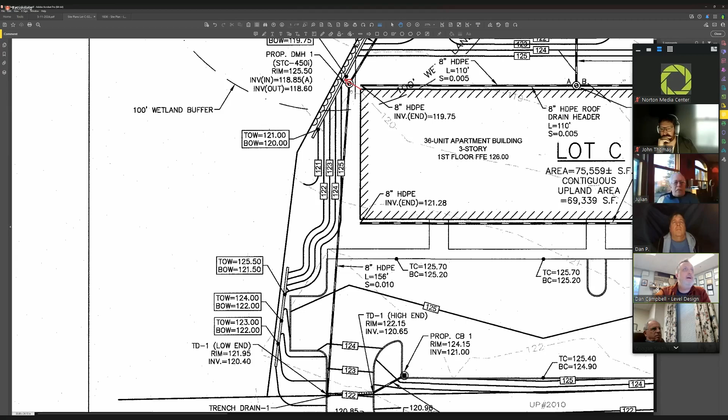Good evening, Daniel Campbell, Level Design Group, on behalf of the applicant. We received our most recent set of comments, which were minor in nature, last week on Friday, I believe. Those comments had to do with this area and the top of this wall specifically, and how the grading flows to the abutting neighbor. And we will respond to the comments, but I just wanted the commission to know our plan is to utilize some grass swales in that area to direct stormwater from the top of the wall.

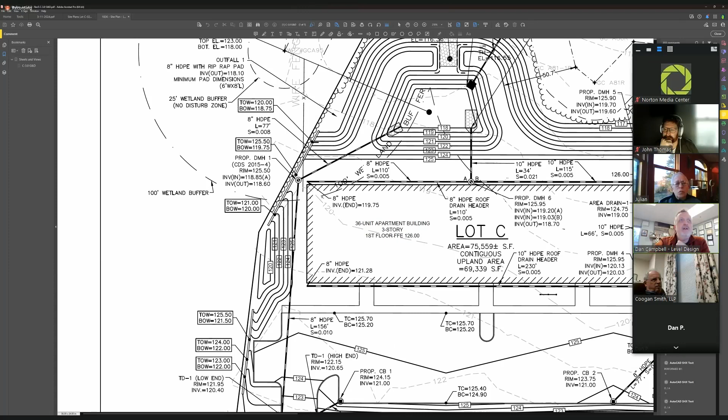This is the start of a draft. We're going to do the same thing on the other side, swaling water down off the wall towards a small grass depression or grass swale in the side yard prior to discharge. And then we're making a modification to the stormwater line. Instead of the stormwater line daylighting, that stormwater line is going to go to the basin for greater TSS removal, making all of our treatment trains compliant as requested by your review engineer at Horsley Witten.

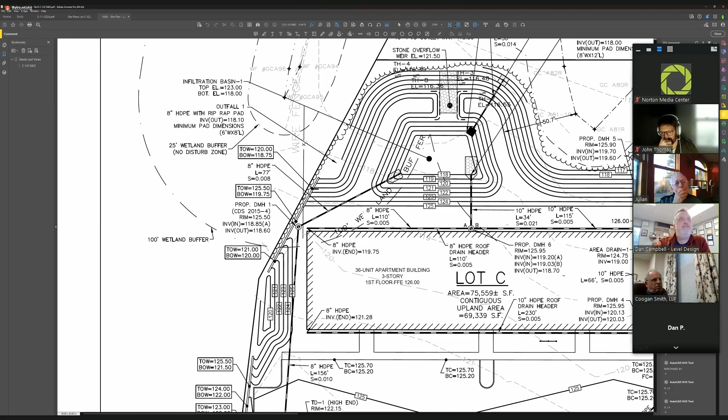Out of the commentary that we had, I believe we've got 4 outstanding comments. I believe 3 of them relate to that area at the top of the wall, and one of them relates to the TSS removal, both of which can be rectified by the same thing, by that movement of the drain line, as well as the modification of the overall swale at the top of that wall. Otherwise, the comments on the site as a whole have been addressed.

As you'll note, from the first public hearing to this one, there have been very minor modifications to the way the site looks, the way the site is graded, and the way the site functions. What the questions or commentary have been about is better clarification for construction documents, what the outlet structure looks like, how the outlet structure functions, providing a detail for the structure itself, not on the piping or the transport of water, but how it discharges that area on the side, for instance. So the site primarily looks like it did during the very first public hearing that we had on the project.

What we've been doing is a lot of paperwork cleanup, and we do appreciate Horsley Witten's quick review on this last go round. I think we handed in right before the previous public hearing, and they did get it back to us last Thursday or Friday. And I think we're going to turn it around tomorrow morning with some of this commentary having to do with that small graded swale area, as well as swaling the water off the top of that wall with the TSS sheets that they requested.

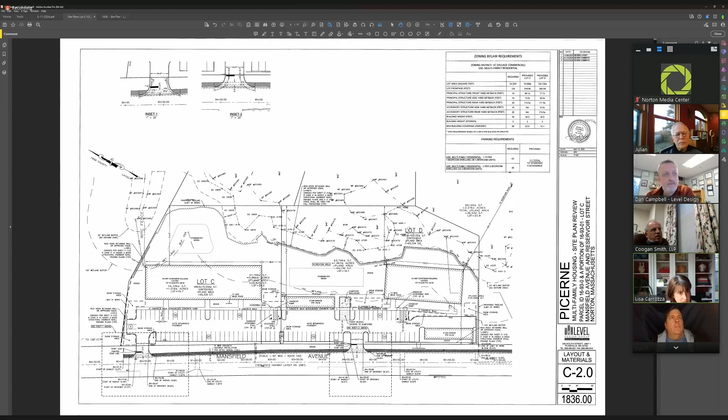Okay, and then I have a last question. You can go back to the layout plan with the wall and the elevation. So theoretically, you're going to have 48 units with zero open space and backyard. And I think it's part of our mission here to make sure that people don't interfere or intrude into what is left over, which is basically the wetland.

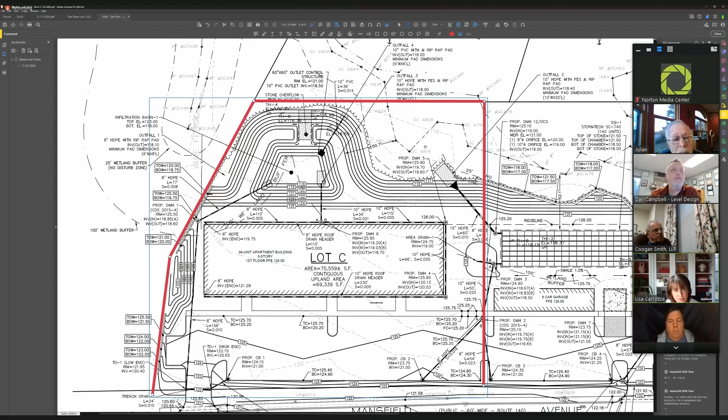So I understand, and that was a question of yours when we first started. So we created an area, we pushed the buildings further apart, and we created an area that was not only blocked from the street between the garage and the fencing around the dumpster, that is on top of this subsurface drain system. So instead of having an above ground basin, we wanted to create an area where the persons who live there could either congregate, could play with their dog, could throw a Frisbee or what have you.

The distance between these two areas is a few hundred feet. So they do have quite a bit of area in between those two structures. Okay, I think where I was going was with intrusion into the wetland. So that said, John Thomas, typically you're not going to have something on top of a wall. So the question is, will the wall itself act as a barrier? How high is that wall? You can run us through from where the outlet is. Looks like it starts there.

Yeah. So the wall starts in this location as it comes up grade 1 foot, 2 foot, 3 foot. On the back side of the wall, it is also climbing. So we're around 1 foot tall in this location. We're around 4 feet tall in this location. We're back down to 1 foot tall in this location. The highest points are here and here. As you're coming around the site, you're about 7 3/4 feet tall here, about 7 3/4 feet tall here, and you're climbing back down to approximately 1 foot tall behind the building.

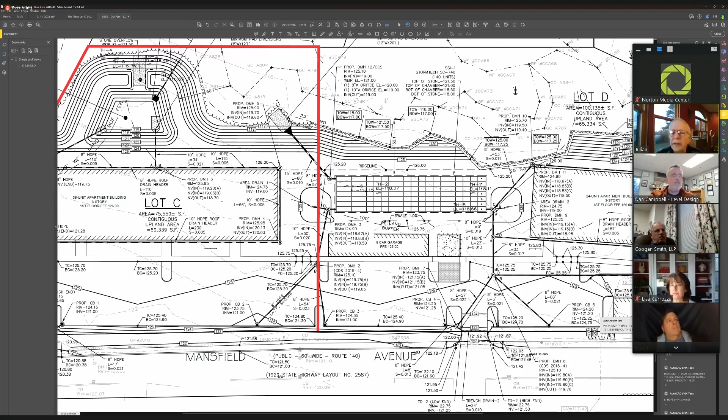I mean, the stormwater peer review is not complete? Is that correct? I gather they've got some minor adjustments to do based on my understanding and my review of the report and the correspondence that's been going back between Dan and our peer reviewer. But I can start drafting up a draft order of the project as such, alluding to the wetland visual barrier posts being put in. We do have placards that we typically use, but to Mr. Jacoby and also Dan's suggestion, having additional signage that says no dumping, I think that would alleviate a lot of the potential issues we'd see with the apartment buildings being there.

So I can draft something up in the interim, but I would basically look for a continuance tonight for the next meeting and then potentially have a closure and issuance at the next meeting if that's what the commission chooses to do. And that would also allow us to go to planning tomorrow night to make sure that they had no adjustments that they were looking for. So it would make sense that we go over for 2 weeks.

Mr. Chairman, before we consider a motion to continue, not quite yet. We have to open up the questions to the whole audience, just in case there's some people that want to ask specifically about this. You can do that either by going to the reactions button and pressing raise hand, or just putting your mic off mute and asking your question. But unless we have any questions, I think we've covered everything and can continue, coming up in 2 weeks on the 25th of March. So seeing no questions, we can go for a continuation.

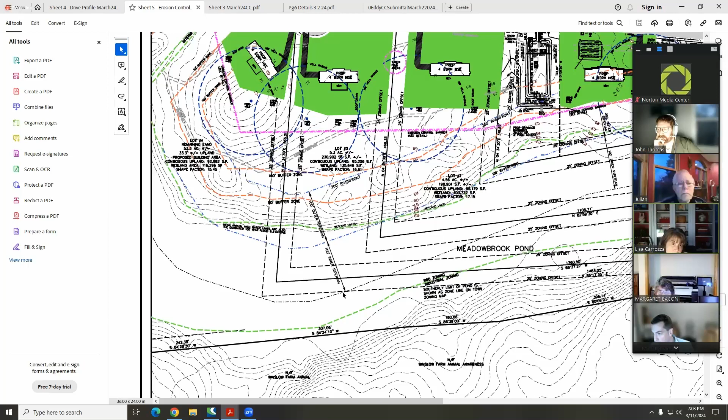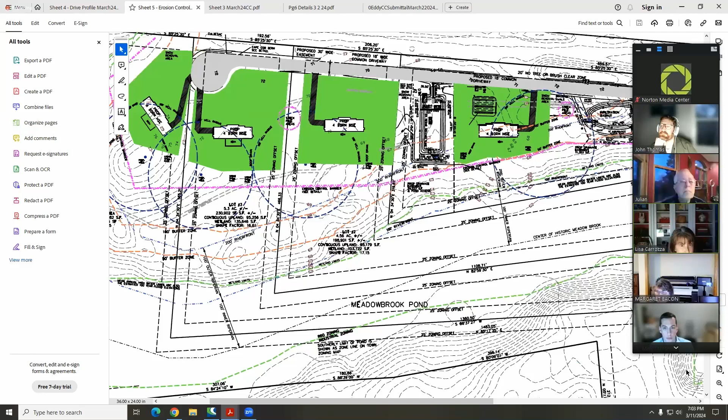Okay, so John, we're going to have to get fairly creative with this in terms of limiting access and tree removal. I see you're showing the lawns theoretically where it's going to be green. If you can zoom in a little bit to one of those lots, what is the pink line? Oh, I got stockpile areas, and this is the erosion control barrier. The sediment control barrier. Okay, so why is the sediment control barrier offset? Is it to accommodate the well? Because it theoretically should be against the lawn.

Well, I had to keep, like I said, the wells pushed back a little. I mean, it could have been tightened up a little, but here's the 100-foot buffer zone down here, and the erosion control does get tighter as I come up through here to the first house, and then the stormwater basin. Okay, if you can just tighten up the sediment control to meet the lawn wherever you can, that would be helpful, because they don't really need to clear beyond that, correct? No? Okay, so if you could tighten that up, that would be great.

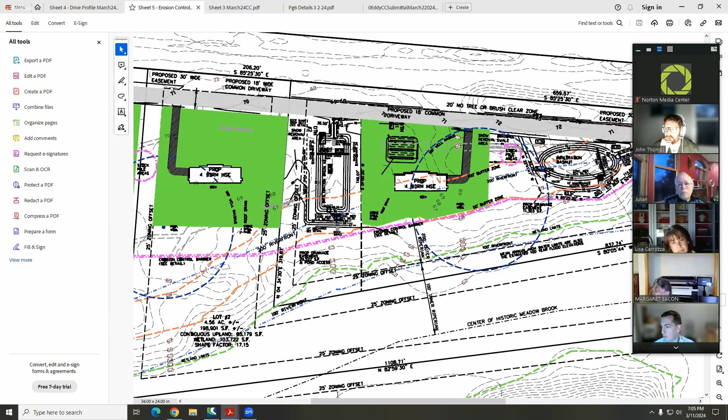Now, the one thing I think that's missing, that you haven't gone over, is your new riverfront area calculations in terms of impacts based on this new layout. For the record, we'll need those. Actually, the riverfront impacts really don't change. So here's the 200-foot riverfront area right there. It goes through this basin just like it did before. That doesn't change. It just clips the corner of that house and this lawn.

So the only house that's really within the buffer zone in the riverfront area is this first lot, and then the stormwater basin here, and the other area in the riverfront is the existing gravel drive. So those calculations haven't changed from the notice of intent, and we're still well within. I think the amount of riverfront impacts is 1.6% if you do the math based on the total riverfront area on that parcel.

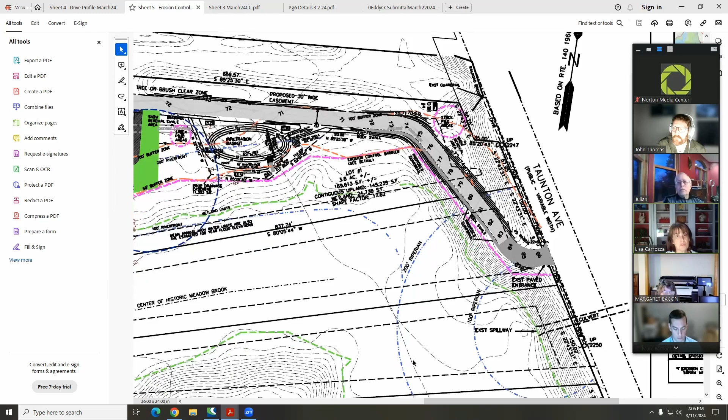Okay, and that was going to be my next question. So can this parcel, exclusive of what you've already subdivided, be developed any further? No, because the planning board's specific, we have four lots. That's all we can get on here. This is what was approved by the planning board. Right. I think the point I'm getting to is, the owner owns more than just what you're showing us, correct?

And they could come at some point and show us yet another group of houses, so we have to take a cumulative approach to the riverfront on this. I know it's a very large riverfront. Your denominator is huge. It's only 1%. But it's just something that we have to be mindful of.

So maybe we can just put that in the findings, John. So Thomas? Yeah, they're not going to be able to. They're basically locked in. The rest of the property's landlocked. The common drive, this whole entire area, this common drive, I think they had to get a waiver for to even get in. Okay. So there's no way they're going to be able to develop any other portions of the property.

If you're talking about more development on the 4 lots here, I think we should write that in as saying that, for instance, any future disturbance or anything they're proposing to do, they need to come in for an evaluation through the Conservation Commission to establish. And we just basically use that existing riverfront calculation cumulatively for that. So we can write something up in an issued order stating the facts there.

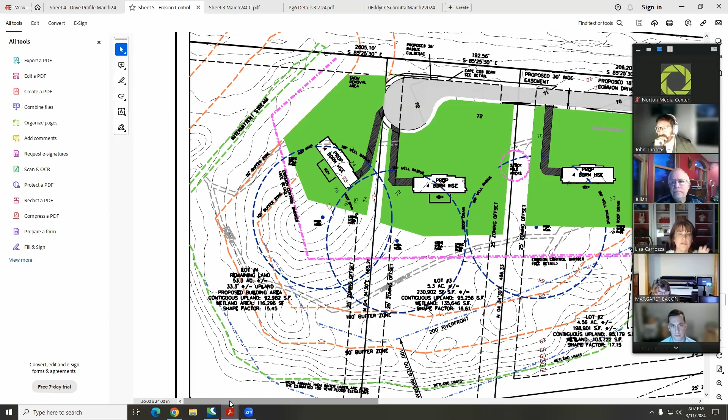Okay. Can you zoom in on the access path, so that we don't have 4 separate homeowners trying to create paths from their backyard and cutting down vegetation? Sure. We were trying to take advantage of this existing easement right here for this stormwater or infiltration basin. So I do have a walking path right here for pond access, and it gives me the area of the easement here. I know it's not very legible, but right here, walking path for pond access.

Does that go to the pond edge? It should go to the pond edge, yes, because here's the easement right here, and this is the other side of the easement to the pond. So we're going to want to see that pathway going to the pond so we can just have record of it. That way we can just have that information laid out, so if anybody has any questions, we can say it was established here for the residences, the HOA, whatever they're going to be. So we can basically maintain it and establish it.

Yes. I do know the original ANR plan had the original common driveway right through the middle, and that's where that easement is. So we have to revise that easement to reflect the new location. And I believe under that plan, we could better describe the easement for the walking path here at the stormwater basin, because these are all going to be easements also, so they should all be included on that.

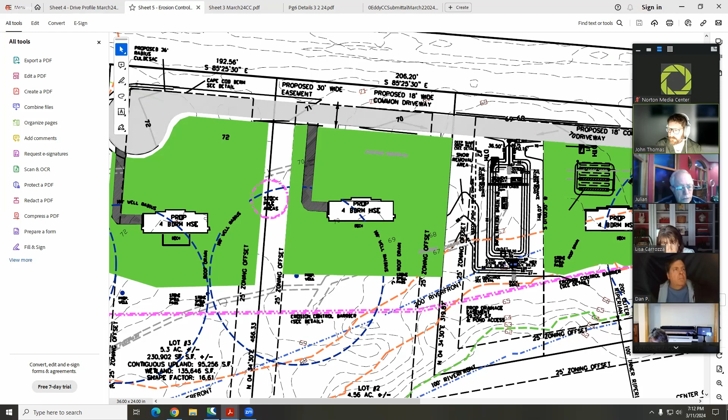So, John, I think I'm going to need some clarification. This project has been going on for a rather long time, and now we have a change. Is additional information going to be forthcoming, or are we at a point where we would actually consider closing this? Well, I leave that up to the commission to make that decision, but one condition that I am going to recommend, that I've talked to Mr. Wydacht about, is conditioning the existing dam that's out there.

We've had a discussion about it, so I think the homeowners association is going to be responsible for making sure that that is free and clear of all sorts of debris, functioning properly, and there's no obstructions. And they're going to be responsible for any sort of management criteria. I just don't know if the commission wants a formal operation and maintenance plan from the HOA, or something just in the event of an emergency. So I assume there's going to be a stormwater

O&M plan. So there is a stormwater O&M for the roadway. It doesn't include the dam. Right, but it includes the infiltration basin so those people know what they're getting into. Correct. So who's going to own the dam? Is it going to be all four homeowners? That is my understanding as of right now. Well, I absolutely think we need to have an O&M plan for that then.

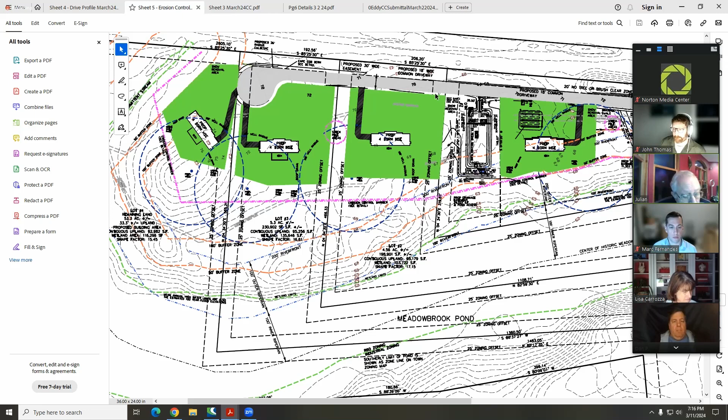So unless there are further questions or items to discuss, we can consider a motion to continue this hearing until our next meeting, which is the 25th of March. So moved. Second. Motion made by Lisa, seconded by Marc for continuation of the hearing for file number 250-1136 until March 25th. Roll call vote beginning with Tamah and Paxton. Aye. Aye. And Marc and Dan. Aye. Aye. And Lisa. Aye. And I'll throw in an aye. So the motion carries. Depending on what more has to be discussed, we may or may not see you next time. Okay, thank you.

So our next item on the agenda is file number 250-1143, 360 South Worcester Street, concerning a warehouse construction. On my agenda, there is a requested continuation until April 8th.

If nobody's going to say anything about it, then I will happily make a motion to continue the public hearing to April 8th. Second. So we have a motion by Dan, seconded by Tamah, for continuing the hearing for file number 250-1143 until April 8th. Roll call vote. Paxton and Marc, how do you vote? Aye. Aye. And Dan and Lisa. Aye. Aye. And Tamah? Aye. And I'll throw in an aye.

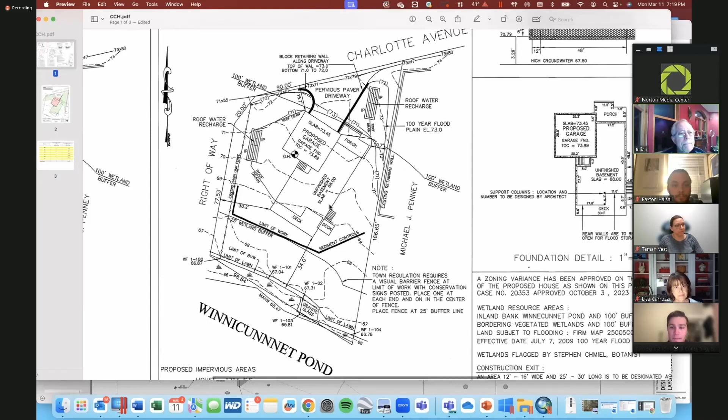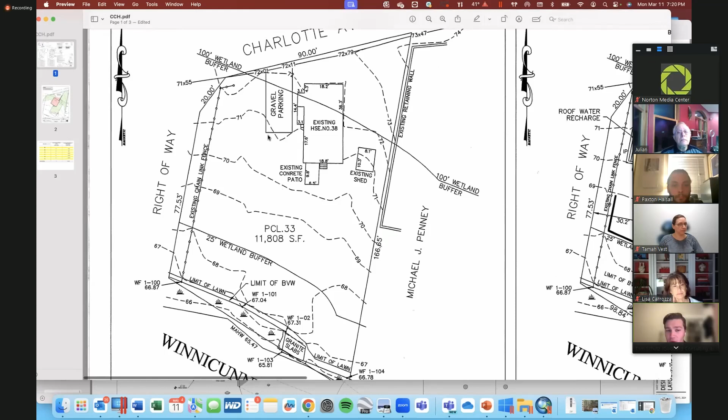Yeah, okay. So just a brief background of what we're presenting here. The applicant is proposing to take down and rebuild the existing single-family house on the lot 38 Charlotte Avenue. The entire site is currently lawn, which is around the existing house. Here's the existing house. We have a gravel parking lot and an existing shed. Down to the south, we have a BVW that borders on Winnicunnet Pond. So the applicant is now proposing a new single-family house complete with a deck, another deck in this location here, a garage with a house on top of that, and then a driveway in this location.

The entire site, except for a small portion up in this location, is within the 100-year flood zone, so it's all within bordering land subject to flooding. So we have provided the calculations to mitigate for that. We have a net increase of flood storage on the site. That information was provided to John. We have provided new plans that include grading up in this location here. These are graded down to provide more compensatory flood storage. As you can see, the dash line is the original grade, and we're grading it all the way down to 72 in this spot, and then grading the 71 up to here. So providing additional flood storage than what we had previously provided to the commission. We're also doing increased grading in this location here too, just to allow for more grades at the elevation 70 and 71 and 72.

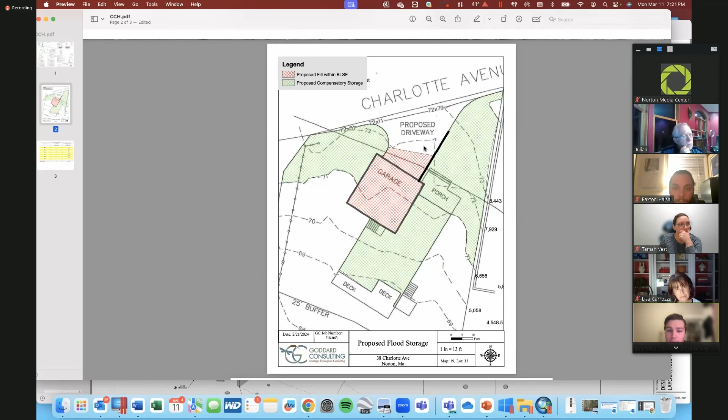So here is a graphic of where we're providing all of our compensatory flood storage. In the red, this is where we're going to be filling the flood zone. That's going to be a portion of the proposed driveway, and then also the garage, which is going to be outside of the FEMA flood zone elevation of 73.4. The rest of it is going to be within the FEMA flood zone, but cut down to elevation 68 all the way up to 72, which is up in this location. We have a cut and fill table here. As you can see at each elevation, we're not increasing any of the fill. We're actually providing additional flood storage at each elevation right here, resulting in a total of 1,644.5 cubic feet of additional flood storage that was not on the site.

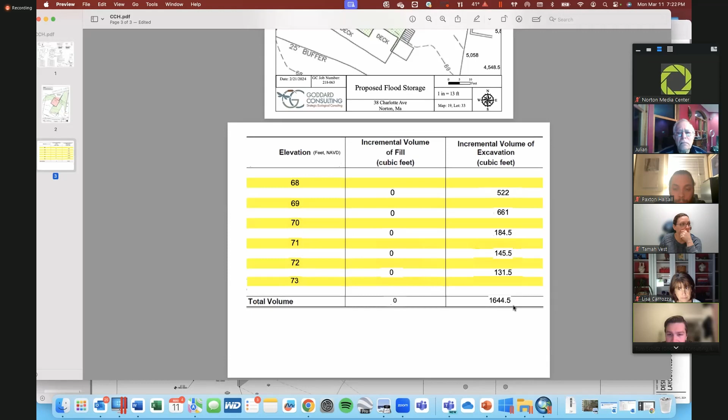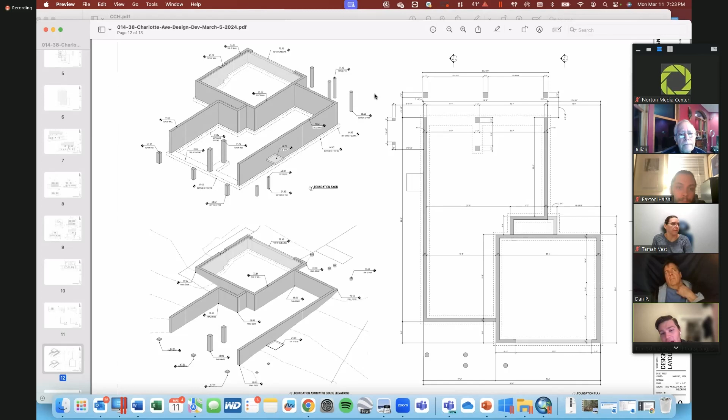We'll also take a look quickly at the architectural plans, because that was something else that the commission wanted to see. In this location here, this is where we're providing a lot of the flood storage mitigation. This bottom section of the house is going to be all flood storage now, where previously there was a wall running across right here that was going to be dry space. It's now going to be all open to floodwaters, so it'll all be able to flood down here. There's going to be no living space. The floodwater is going to be able to enter through the back of the house here because we have just pillars, and then recede back when the storm is over. Additionally, there will be flood storage provided towards the eastern portion of the house. So that was what we provided to the commission. If you have any questions, I'd be more than happy to answer them.

Is there any grading interior to that storage so that the water will flow back out? So it's at grade 68. We can put a very small amount of incremental value, like 0.1, but right now it's unrestricted flow in and out of the back of the house. So it'll flow back down because the elevation down here is 67. So eventually the floodwater will exit the bottom of the house and back into the BVW and Winnecunnet Pond if

that happens. Okay, but you're not grading interior to that unfinished basement. So how does the water get out of there? So down in this location, we're starting our grades at elevation 68 in here, and that grade is going to be all the way back. So as you can see, the slab is 68 here. So the 68 elevation will be throughout this entire thing. So it'll allow the water to enter at the elevation 68, which is down in this portion of the property, and then recede when the water is done.

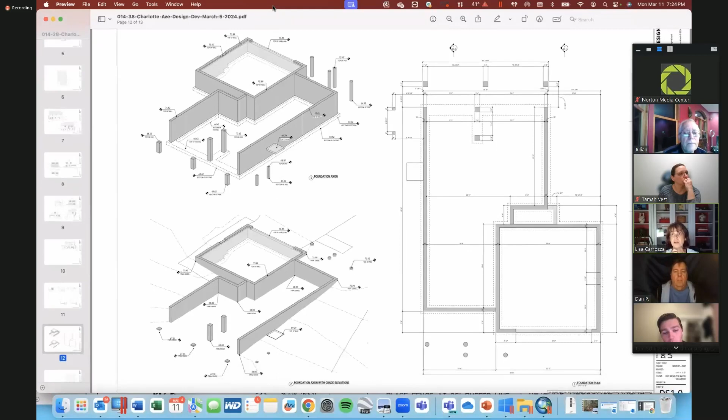Okay, this is what I'm confused about. If the entire thing is flat at 68, then the water's not going to drain, it's going to pond. It's a concrete slab. It'll drain out. It's going to drain out of the concrete slab through the back of the property here because it's going to drain back down to the 70 or the 67 contour when the water recedes. But the whole thing back to the back edge of that foundation is one elevation at 68. Correct. Okay, good luck getting that to flow at times, but okay.

So the house is on top of that area? Sorry, I didn't catch that. You were a bit muffled there. Yeah, the actual house is on top of that open area? That is correct. Yep, the actual house will be outside of the FEMA flood zone elevation. We met with the building inspector and we had a review of the site plans, and he gave us a verbal okay, but he's going to take a second look through the entire site plan and the architectural plans. Those were sent to him, and write a memo saying that he is okay with the proposed site plans as they currently stand.

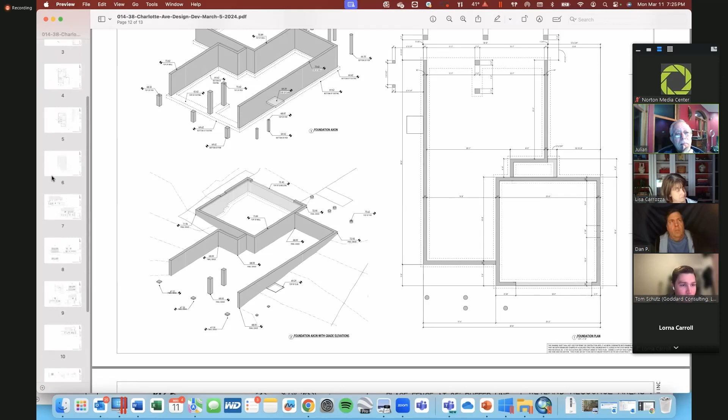Let's see. Is it by a stairway or? So here's a representation of what the house is going to look like. Down in this portion of the house is where the flood water is going to enter. The entire house is going to be above the flood zone elevations. There's not going to be any living space down below where we're currently showing that the flood water is going to be stored. It's just going to be all open to allow the water to have unrestricted flow into our compensatory flood storage below the house.

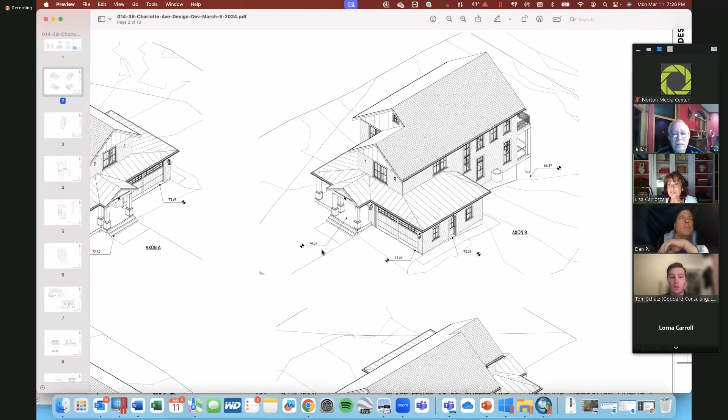I don't know how to ask this again, but in effect, if it's flat, how is it going to recede over that distance? You should be grading underneath that slightly so that it recedes and flows back out. Otherwise, it could be ponded and trapped against that foundation, and I certainly wouldn't want to live there with water standing below my house. So we can add a small elevation change here, but still keep it within the 68 grade if that would be okay. Well, it would be a very slight grade.

Yeah, you need to ask your engineer that, because I would not live in that house knowing that water may not recede underneath me. If it's flat, it's not going anywhere. It's just going to pond up. You're going to have standing water under there. It's not in a coastal environment where you typically have something on piers and it ebbs and flows with the tide. Storm water will recede back when the storm is completed, and the water will recede as well. It's not going to just stand on top of a concrete slab. It'll recede back down to the 67 contour, and then the 66, which is the BVW.

It won't make its way out of there if it's flat. That's all I'm trying to say. So you should probably check with your engineer, because again, I can see water ponding there. You're saying the 67 is lower at the mouth of it, but in the back it's flat. Well, Lisa, I think the point you're making is it needs to be graded in the same way that a parking lot would be graded to promote drainage. Yes. But this is more a building inspector and perhaps planning board requirement.

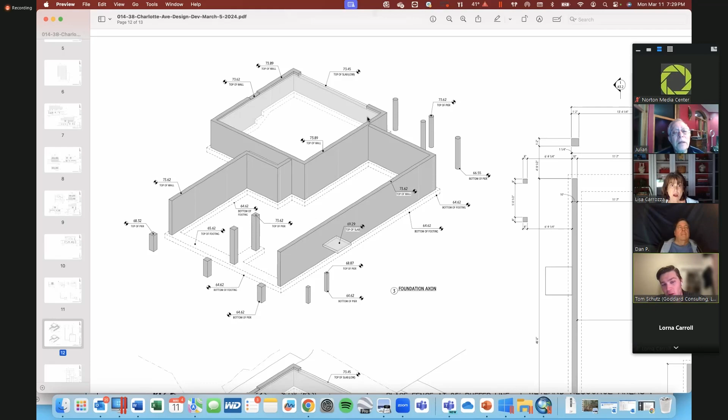All right, and the space under the garage. So this is all being filled under the garage here. This is going to be dry above flood elevation. This is 73.89 at the top of the concrete. So this is going to be the only area aside from this small section of driveway that's actually going to be filling within the bordering land subject to flooding. And we're mitigating with the section under the house and then also the compensatory storage that we're cutting over in the top right corner of the property.

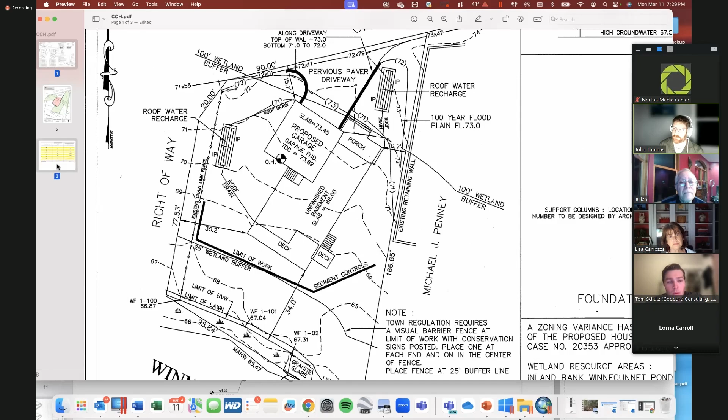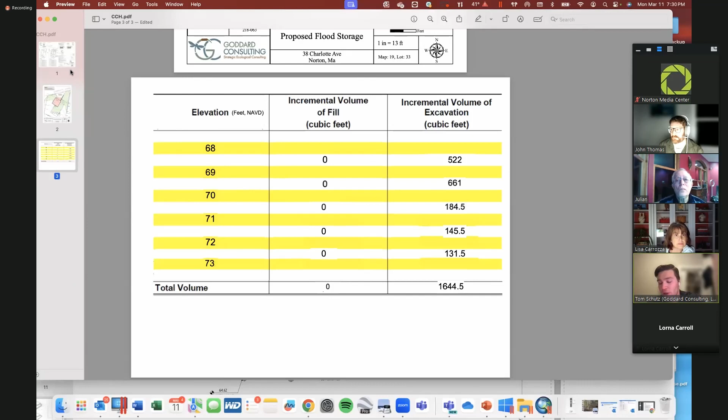Yeah, my suggestions to the applicant were to update the impacts for the fill table because of the garage and also part of the foundation and stuff like that. So we did do that, John. Okay. We sent it. This is all a new table, and then this cut fill table is according to that table. So the numbers we got from here are according to the plan set that we sent to you. Right. So the incremental volume of excavation, I'm talking about the incremental volume of fill.

So for instance, we're going to be increasing the amount of compensatory flood storage at each elevation. So there will be technically no fill within each elevation. The numbers wouldn't be greater than 0 in this case because we're actually increasing the amount of flood storage in the elevations. Okay, so you do the calculation that way. So for instance, if you have fill within the floodplain, you have to call it out. And then basically the volume of excavation gets calculated off of that.

So for instance, what you're gonna need to basically report is that there is fill, because I'm looking at this table and it shows that you have 0 fill when you have a proposed garage that's filling into the, that's what I'm getting at, is that information needs to be reflected accordingly in this table.

That's not how the table works, though. As you can see down here, this is the area that we're going to be having most of the fill because the numbers of compensatory flood storage is the smallest. So in elevation 72 and 71, this is the smallest section of area where there's going to be actual storage, but we're still increasing the amount. So we're not actually going to be having any filling that's greater than what we're cutting in these areas. Okay, this table's wrong because you have to account incrementally. It's like you're taking the delta. You need to show us how you got there.

So I suggest you go back to the MACC hydrology handbook or the state's hydrology handbook and see how to fill one of these out. Because you absolutely have to tell us what the incremental fill is before you can tell us, okay, great, you're compensating for it, but you need to show it. You need to fill out that part of the table, how much you're filling. MACC, I think might not be MACC, it's probably DEP. Stormwater handbook tells you step by step how to fill this out. Because right now you're not showing any fill, but you are filling. So that has to be fixed.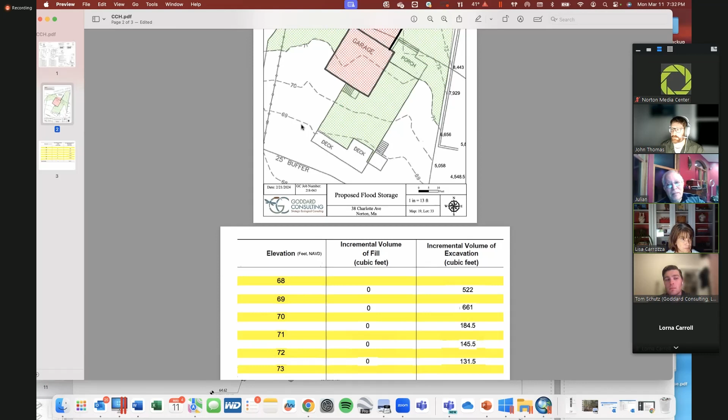And can you go back to the layout plan, please, with the grading? Oh, I mean, it looks like you did the calculation on this plan. These are the calculations for the compensatory flood storage. Did you show the fill there?

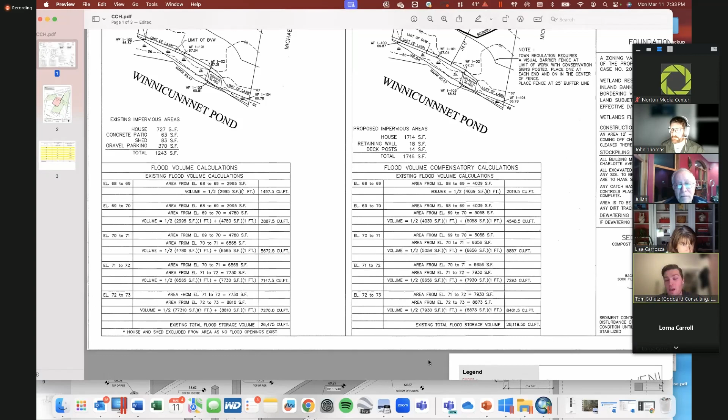Where's the volume of fill? So the way you do these is you take the elevation square footage. I know how to do them, okay. Yeah, I know how to do them, but I'm not seeing your fill volume. But anyway, okay.

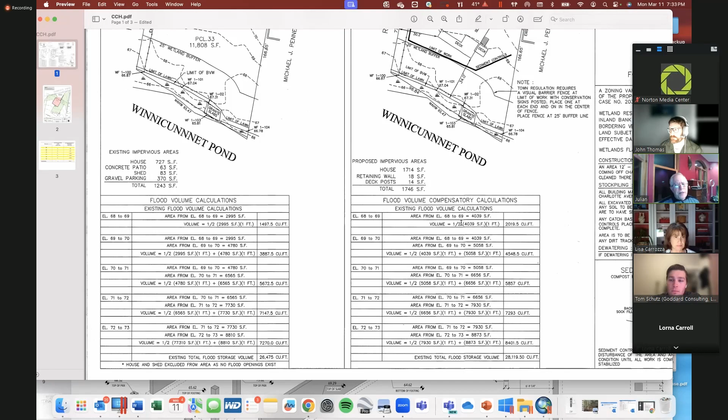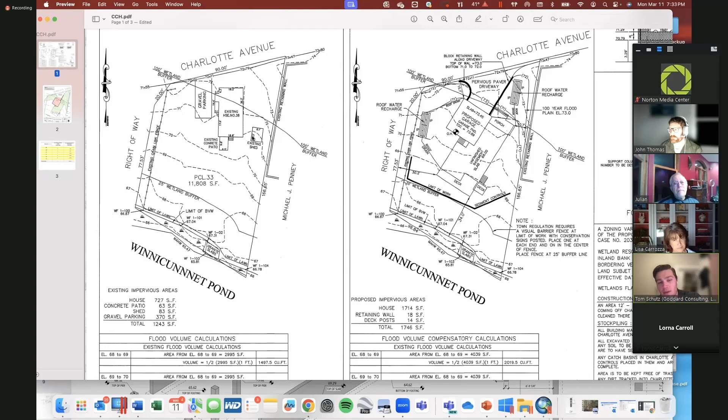Is some of this because you're filling in an area that the previous house displaced? That is correct. So okay, well that needs to be clarified, I think. It is clarified in these numbers here. These numbers reflect that the proposed garage and the area within the small driveway is essentially the same as this piece of the house and the existing shed. We're actually increasing the volume by a slight margin, several thousand cubic feet.

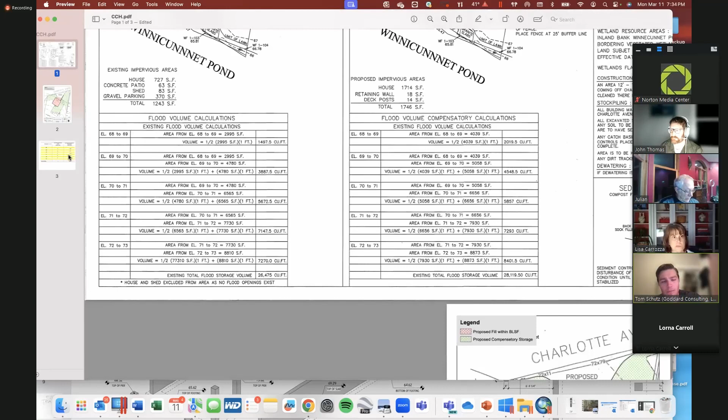Right, but go back to your table for a second. So the way the table should be filled out. So the table, okay. The table is subtracting the current value of what is out there to the existing table. That's how we filled it out. We're not increasing any fill in any of the locations. We're actually increasing the amount of excavation in all of them.

Right, but what you need to show here, so between 68 and 69, you should have a value. What is the incremental volume of fill? Say that's 320 cubic feet, and then you're going to say at that same elevation, we're going to have the excavation, which is the storage proposed, which is the 522. So you need to show on an incremental basis that your compensation volume is higher than your fill volume at each elevation. So I think that's the only thing that's missing from this table.

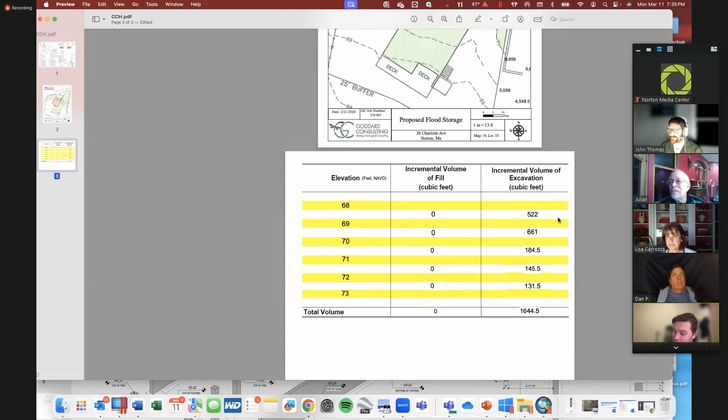Tom, you're not responding to that. We'll certainly check it out, and we'll take a look at the table and send it back into John when we've had some time. But we're definitely going to need to take a look back and see if we can revise the table accordingly if needed. Or otherwise, we'll speak to John and work it out. Okay.

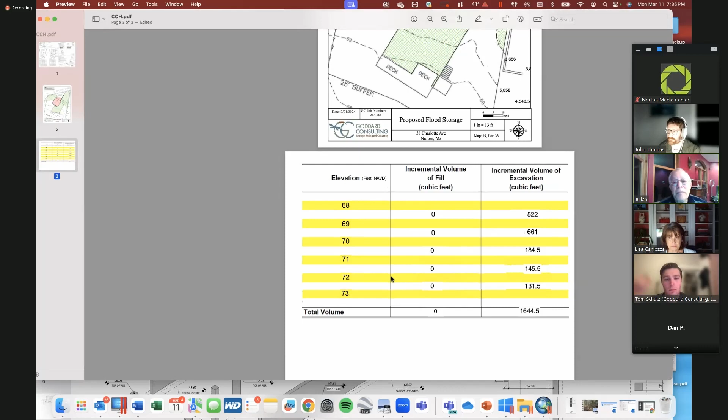I mean, certainly I would comment this is a big step forward compared to what was initially presented to us, and I think these are relatively minor issues that can be clarified. I think all the information's here. It just needs to be compiled neatly and comprehensively in a package. I think Tom and his team did a good job with getting us the information and everything. Some of the information needs to be clarified, but I think most of the information's here. We just need to get it more concise and into a good package.

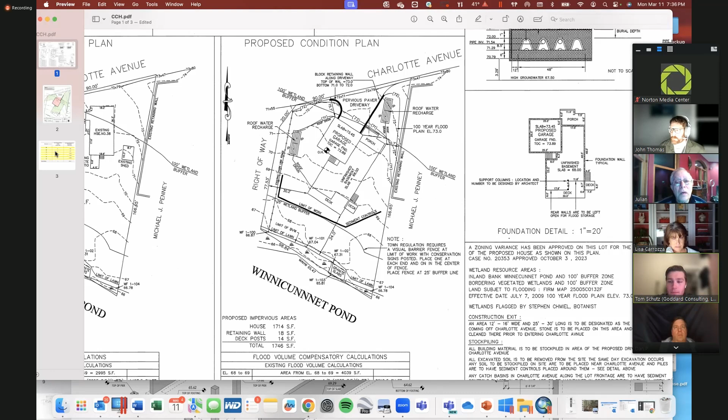So what would you like to see for the next hearing aside from the updated table? Is there anything else? And then check with an engineer about grading below that foundation so that it drains out and you're not compromising flood storage. Yeah, I gave you guys some suggestions. Obviously, the thing to take a look at is just to make sure the foundations and supports are calculated into your BLSF impacts, and just make sure you got all the information you need. And you sent me over the WPA form. I haven't looked at it yet, but I'll take a look at that and see if everything jives. But if that changes, obviously send over a revised version of that as well.

Okay. This is Eric Wensley, the homeowner. Yeah, Tom, thank you for bringing this forward. I appreciate it. It's a really good job.

My one question is for John and the commission. In the interest of time, for the remaining items that we have going forward, do you guys see any issue with the foundation design? For example, it's going to take some time to get this through structural engineering and things of that nature. I know we got through the building inspector. Nick had approved or was okay with the design that we had. I just want to make sure that the commission, at least from a structural standpoint, is okay, other than the grading issues and things of that nature. Do you see any changes on the horizon in that regard?

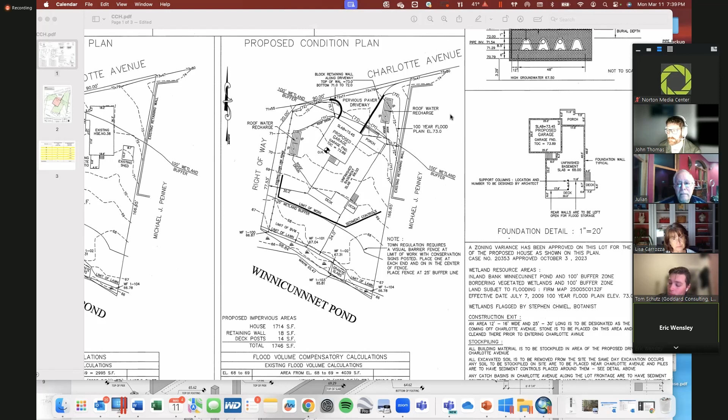Yeah, understood. And just so the commission knows as well, I'm not a builder or developer. My wife and I are going to live in the home, and obviously we'll get old and sell it at some point. But we're building it for us and our family. So, but I know that doesn't have any bearing or anything. Yeah, presumably you're not building it so that you have periodic flood damage. So yeah, of course, but we're not doing this with the intent of being out of it right away and having a future homeowner get stuck with a situation that they're not familiar with. So hopefully we're there long enough to experience whatever there is to experience and be able to pass that knowledge along to the next homeowner.

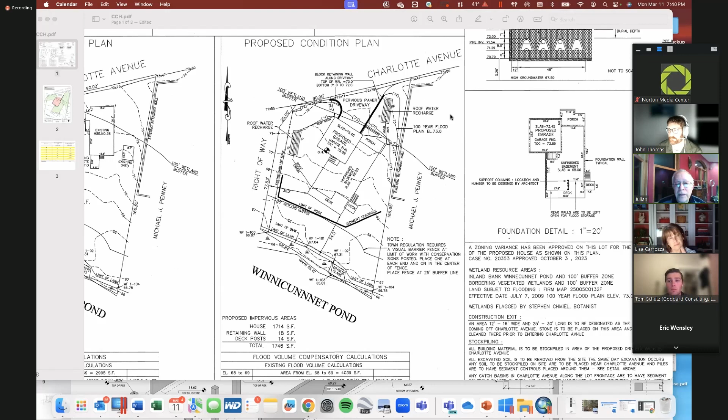Yeah, but from our perspective, we review many projects where the developer is here to present a design and sell something to buyers who may not be savvy about what the future risks are. For sure. And so you have to understand our perspective. Absolutely. That we're here to protect the interests of those who live here in Norton. Yep, for sure. And I appreciate that, guys. Thank you. That's all I had. Thank you very much.

So I think it still is within the possibility of being able to review an order of conditions next time, assuming everything gets addressed. But I think for the moment, we need to continue this hearing, and we may be in a position to just close it out and review the order. And I will work on drafting up an order for the next meeting in light of our discussions this evening, because I feel that the applicant can get the necessary information to the commission and make responses and changes to the design as needed.

So that being said, unless there are further immediate questions, we can consider a motion to continue the hearing for 38 Charlotte Avenue to our next meeting, which is March 25th.

So moved. Oh, second. That was pretty simultaneous. Not even a stopwatch would do that.

All right. So we're going to say motion by Dan, seconded by Tama for continuation of this hearing until March 25th. Roll call vote starting with Paxton and Dan. Aye. Aye. And Mark and Lisa. Aye. Aye. Tama? Aye. Okay, there you go. And I'll throw in an aye. So thank you guys. And we'll see you next time.

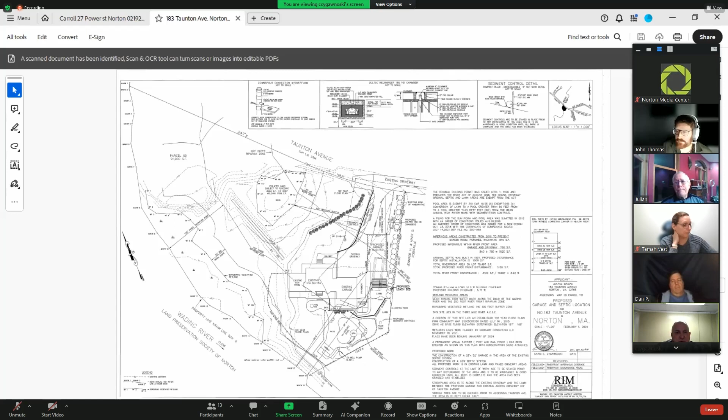Next item on the agenda is file number 250-1149, 183 Taunton Avenue. Do we have a representative of the applicant? Craig Cygawnoski of RIM Engineering, representing the owner, Lucas Washington, not with us tonight. Assume you want me to share screen. Go ahead, Craig. You have sharing capabilities. So, did that come up for you? Not yet. Yeah. Now it is. You'll have to enlarge it a bit, though.

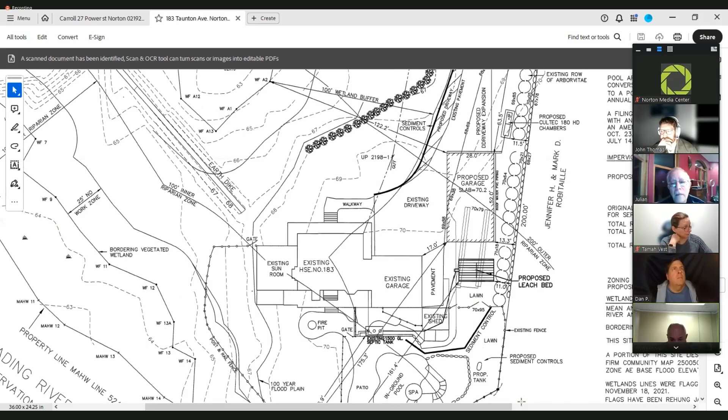Yeah. So the last time we were before you, there was a comment from DEP regarding the existing septic system. But just to refresh what we're doing. 183 Taunton Avenue backs up to the Wading River. So we have riverfront. We've been before you in the past for the pool area, for the sunroom that was added, porches that were added, porch in the rear, porch in the front. That was all taken care of through order of conditions, and then it was finalized through the certificate of compliance in 2021.

And at this time, on the property for wetlands, we have the BVW along the river, but also an isolated land subject to flooding here, and then the 100-year floodplain runs through roughly where these trees were put in to protect it, as there had been damage to the area in the past. Now what we're looking to do is to add a garage, but it's a garage that's for an RV, so it's 52 by 28.

Sits on the existing septic system. The trenches run here. So we're proposing, and have been approved by the Board of Health, a new leach field using an alternate system, so that reduces the size. We have the existing tank in the back, so the piping will come up, and then in front of that will be the proposed garage.

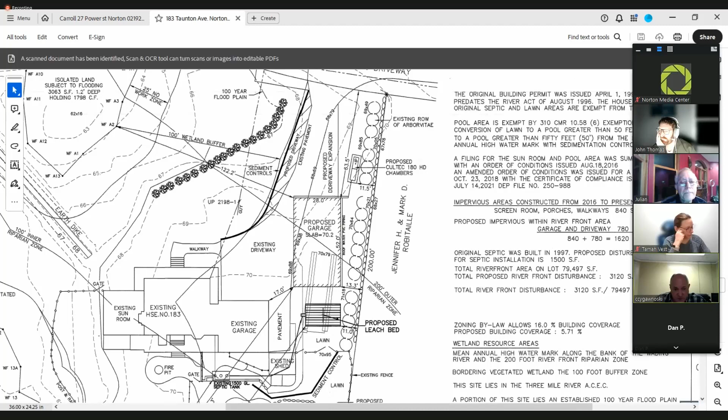What DEP had pointed out was that because this leach field, even though the house, the driveway, and so forth were from 1996 prior to the Rivers Act, the septic system actually didn't go until 97, so they asked for the area of disturbance that we are showing from the sediment control here to the garage within the riparian zone to be added to the calculations.

So we have a total riverfront disturbance of 3,120 square feet. The entire area is 3.92% of the riverfront over the entire lot. I believe that was the way we left it last time, that John and the DEP had asked for these calculations to be updated to reflect that disturbance area. So if you have any questions regarding this, I'd be happy to answer them.

So, John, that completes the information that was outstanding then? From what I could assess and evaluate from what we had, yes. That was one of the most lingering things, from DEP's comments for the septic. So we can consider closing this and doing an order of conditions at our next meeting. If the commission chooses to do so, yes.

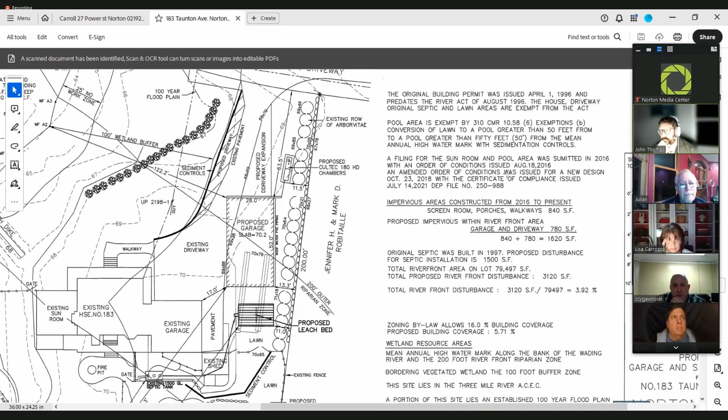So I just had a quick question. The original house, was it exempt under Riverfront? Yeah, so it was permitted in April of 1996 and the Rivers Act didn't come out until August 96, so it was exempt. So it's not cumulative. We're starting at whatever's new today, right?

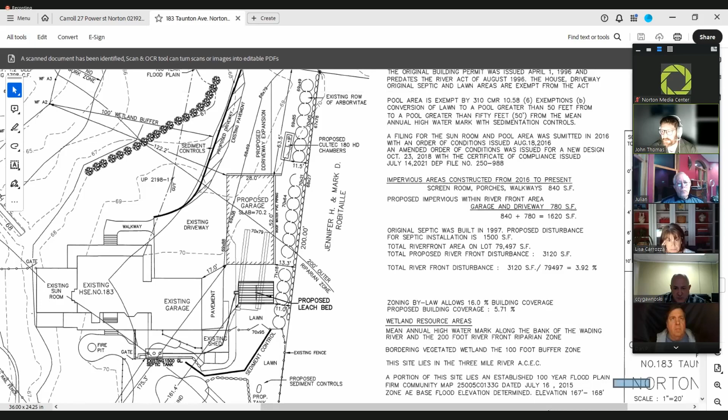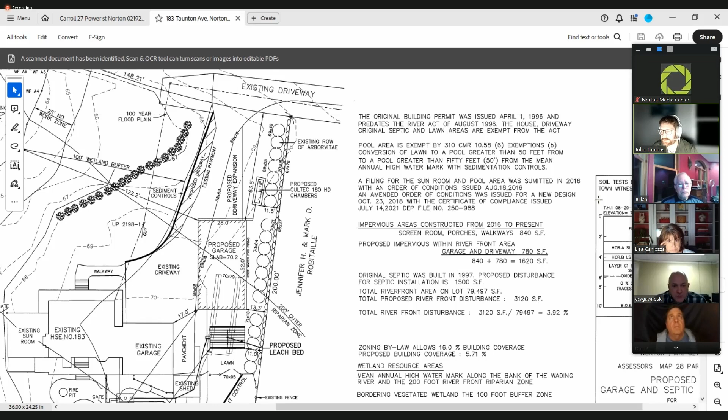Yeah, so the applicant came in, I think back in 2015, 2016 to do some work, and that information has been cumulative, but everything before that, from the original construction permitted in 1996, is exempt. So the original house and everything like that is exempt. Okay, thank you. You're welcome. Any further questions from members of the audience or commission?

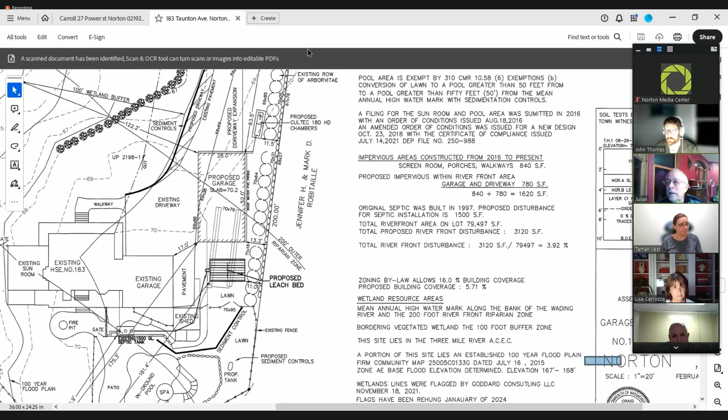So if not, I think we can consider a motion to close unless somebody objects. So moved. Second. So motion by Tamah, I'm going to give the second to Lisa. So roll call vote starting with Dan and Lisa. Aye. And Paxton and Marc. Aye. Aye. And Tamah. Aye. And I'll throw in an aye. So the motion carries. We've closed the hearing for file number 250-1149.

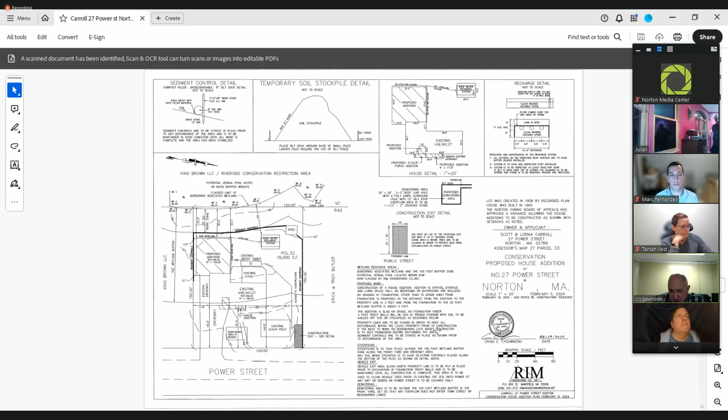So the next item is file number 250-1150, 27 Power Street. Do we have a representative? Yes, it's still me, Craig Cygawnoski, Rim Engineering. Also, Lorna and Scott Carroll are on. I can share the other plan. I can find it. Give me a second here, please. Okay, this is 27 Power Street. The last meeting, we did not have a DEP file number, but it was issued the following week.

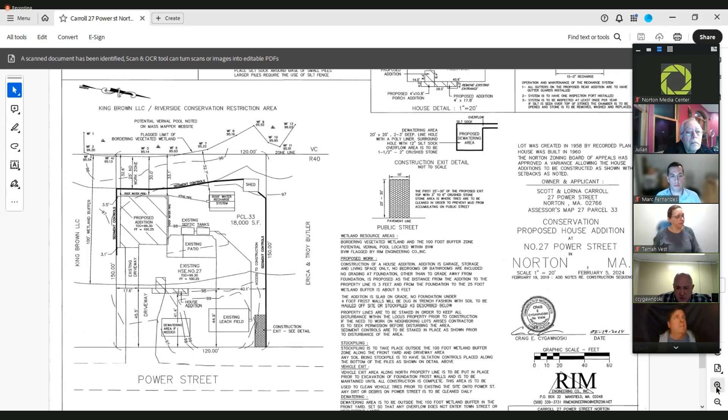So if you recall, we have bordering vegetated wetlands at the rear of our property, right at the property line. The small lot, 18,000 square feet. The house is set about 17 feet off the property line. We have been before the Zoning Board of Appeals for the proposed addition, which is this area here, which will be about 3 feet off the property line here, 30 feet off the rear property line, 33 feet off the property line, 30 feet off the BVW line.

So we had gone over that the property lines will have to be marked out, sediment controls staked in place prior to any construction. Spoke to the contractor about this. We have a piece of driveway that comes up along the side of the house. He can park here and excavate these walls; this will be a slab on grade, no foundation underneath, so he's just digging for the frost walls. And we can enter the property over here, avoiding the leach field and the septic tanks behind the patio, and come over here and also dig these trenches, pour the frost walls, and then pour the slab on grade.

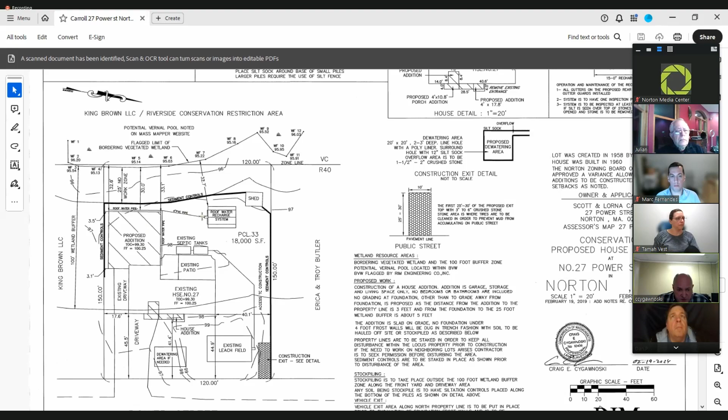We are doing a roof water recharge system off the new addition. It's very shallow. We're just doing it like a septic system with 6 inches of crushed stone and the 4-inch PVC piping, because we know we have high groundwater out here. We are calling for a dewatering area to be in the front, and all the stockpiling as needed to either be in the driveway or in the front yard, not on top of the leach field, obviously, but there is room here for storage of materials.

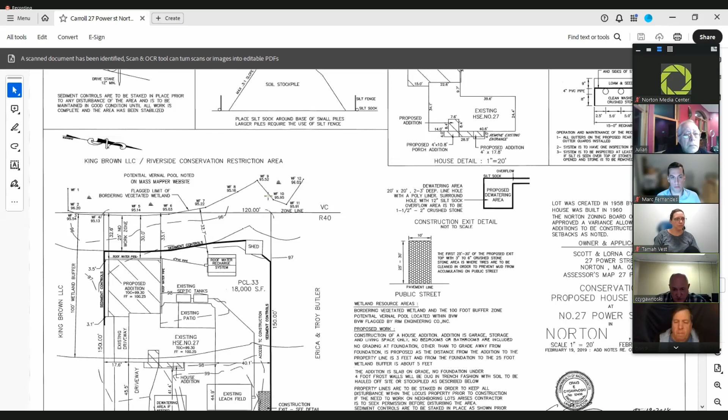If any soil is being stored, then it'd have to have sediment controls placed along the base of the piles. That detail is on the plan. Sediment controls, and then we have a construction exit here with crushed stone to protect the road from the mud. So that's where we left it last time. And as I said, if we had had the DEP file number, we felt like we could have closed it last week. So we hope that we will be able to do that this week.

If you have any questions about the project, I'd be happy to answer them. So other than the file number, this is pretty much identical. There have been no changes on the plan, is that right? Correct. I have not made any changes. Yeah. So the only recommendation I made last time was to make sure that the encroachments that are on the abutting CR parcel are removed prior to any pre-construction meeting.

And then we're probably going to want to put up some sort of visual barrier along the CR and also the rear of the property for the 25-foot no disturb buffer. So just be prepared for that as being one of the conditions in any sort of issued order of conditions. Would they be allowed to use the post with the signs on them? That would be my recommendation, and I leave it up to the commission to make that determination.

And then I had mentioned what you said about the disturbance on the abutting property. My client wasn't aware of what you were referring to. Mm-hmm. So before the pre-construction meeting, if we could just clear up all that encroachment material, that'd be great. Do you know what the material is? We can go over it if we want to have a pre-site meeting, but the aerial that I have shows some encroachments, and I'm just going to leave it at that. Okay.

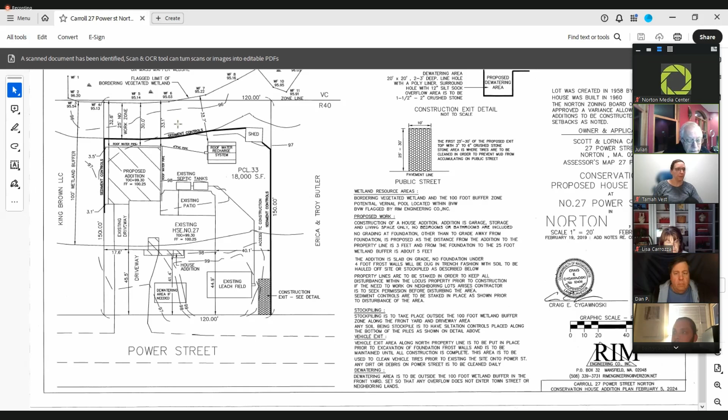Roll call vote, starting with Tamar and Paxton. Aye. Aye. Dan and Lisa. Aye. Aye. And Mark. Aye. And I'll throw in an aye. The motion carries. So we'll be doing an order of conditions next meeting. And that completes our public hearing schedule.

Next item on the agenda is a request for, well, you might have to clarify for me. Oh, this is a certificate of compliance, file number 250-976 at 26 East Main Street. So this is for Wheaton College. This is the treatment of the Peacock Pond. They're coming up for their, I want to say, third extension for this treatment that they've done.

And my recommendation for them is to close out the order, and we'll basically just have a perpetual condition in there that gives them the luxury of filing an annual report every year, notifying us of what their schedule is for treatment of the pond as we move forward. That way they don't have to keep on doing these extensions. I don't know if the commission would be amenable to that, but it was just a suggestion because their treatments have been the same for the past couple of years.

Isn't that right, Colin? Yeah, that's correct. I think this would be our third extension here. So nothing's changed. We're using very low toxicology herbicide. It's used in drinking water reservoirs. So, like you said, we're just continuing maintenance, but we would keep the commissioners informed. And then we do reports at the end of the year just to keep everyone up to date.